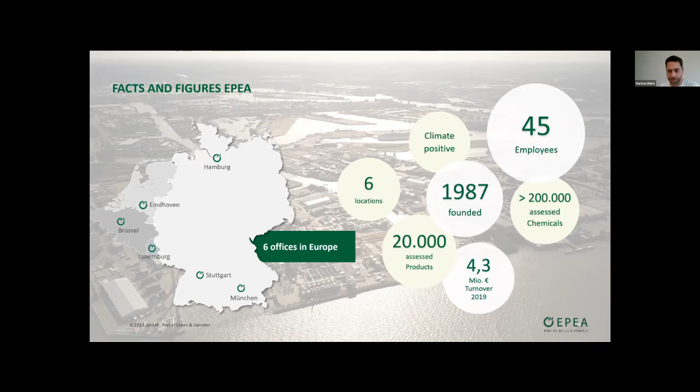Quickly about EPEA, we are 45 employees overall in 6 offices in Europe. So the head office is in Hamburg basically, because this is where the company comes from with 35 people, and the real estate team with Pascal, they are mainly sitting in Stuttgart.

Now I would like to point out what is our challenge, because this is the reason that I talk to you basically, is that we have a lot of materials in construction industry, and after the usage time of a building, they are demolished like you see in this photo, and we don't really know what's happening with the materials nowadays. Some are still recycled, but we call this downcycling. Because if a facade window becomes a water bottle or a beer bottle, that is not upcycling, that's downcycling.

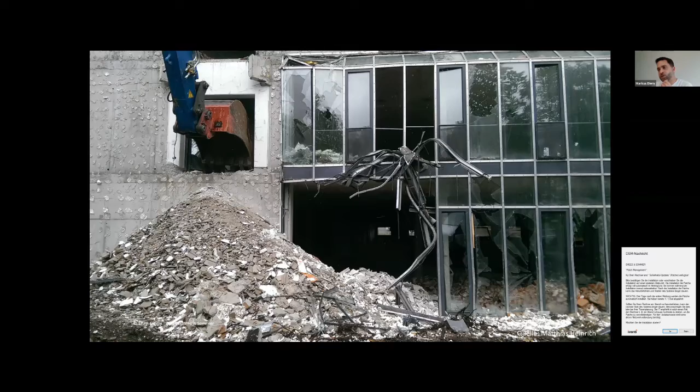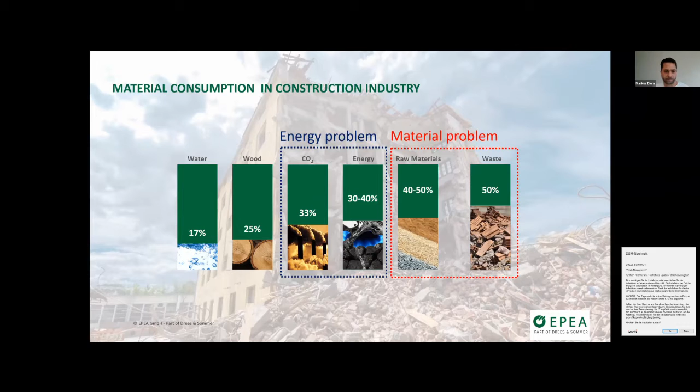So the next thing is that nowadays we have a big problem: we are mostly spending our time indoors, 90% of the time here in Europe on average. We use more and more different materials, and there's more and more chemistry in these materials, and it's not always known what these chemicals are doing to human health. There's a visible increase in people having allergies, and often the source is that bad materials are used with poor indoor air quality, and this is what makes people sick. We have huge problems here in Germany, also with schools, where the indoor air quality is so bad. I think the right answer is to use healthy materials in these projects in future.

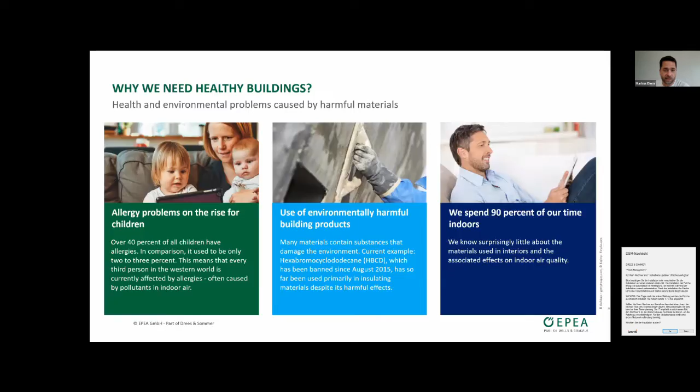Why is this happening? Back in the days, 200 or 100 years ago, we did not have so many different materials, and the building envelope quality wasn't as good as today. There were a lot of gaps, it wasn't really airtight, so bad air could move out and be ventilated. Then we came to saving energy, so we sealed our buildings, we even do blower door tests. The consequence is that all the toxic, harmful materials already inside are trapped inside. That's the problem you see in the second graphic here.

Where we need to go is to keep our buildings well insulated so we use less energy, but the materials inside need to be healthy. This is the big issue, because if the materials are healthy, there's no harmful stuff inside the building. Michael Braungart always mentioned that sheep's wool isn't red wine proof - you can buy a natural carpet made of sheep wool, but the industry adds chemistry to make it red wine proof. What's in this chemistry, a lot of people, or we, don't know. So this might be harmful material.

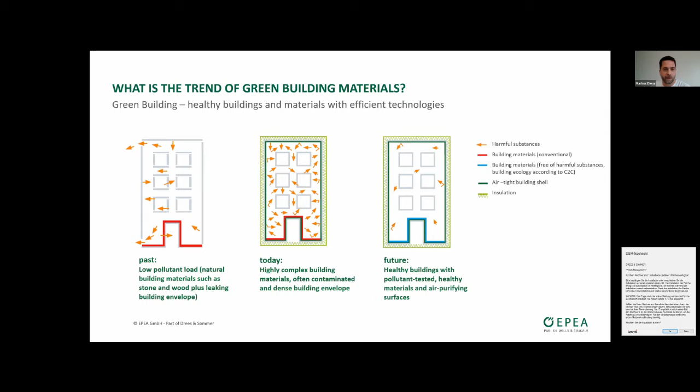Here you see something of this harmful material, which is basically in our lungs when we are inside an enclosed space.

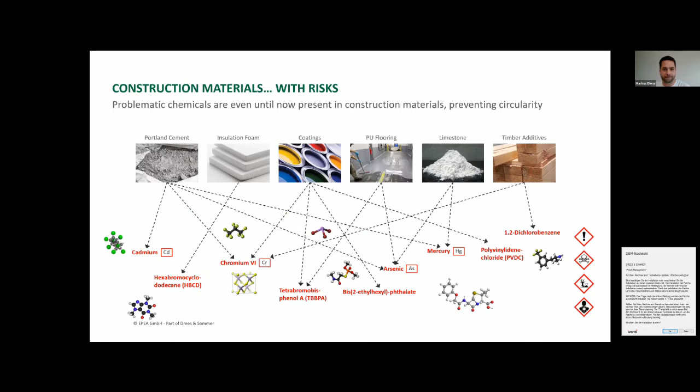So our solution basically starts with the cradle-to-cradle design concept, which I would like to explain quickly.

So here you see where we are today - this is the linear economy. We harvest a resource, we design it, we make it functional, and it should be cheap because it competes on the market with other products. The problem is we don't know what's inside. Now we do more repairing, reusing, and downcycling, but the issue is the content of the material isn't known - we don't know what's going on with it. It's not defined. The only thing we sometimes have is 'it's free of' - if harmful substances appear in the media, companies say they removed this chemical, but we still don't know what other chemicals are in it. This is the big issue.

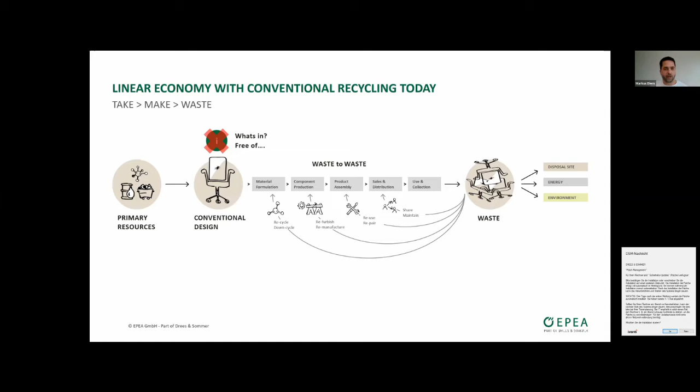I'll give you another example, the ocean plastic. We hear a lot about it. Companies nowadays make big advertisements. They say they save the turtles in the sea, they save the fish, they take the PET bottles out and make textiles out of it.

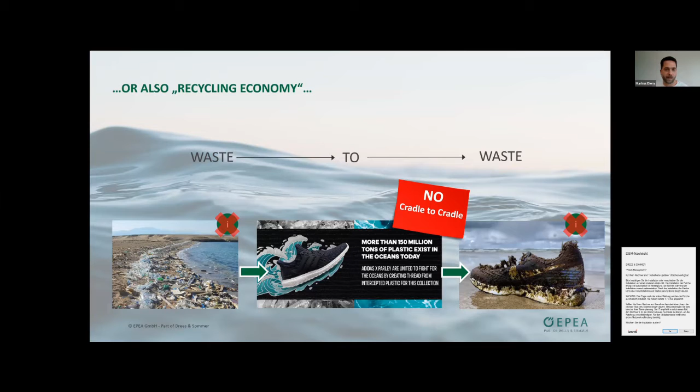So the solution is these two circles that I mentioned before: materials of products circle in a biological cycle and a technical cycle. This means everything which is used up, for example like a tire, the rubber coming down, that is coming into nature, into the environment. This is stuff which should be in the biological cycle because it's out there in nature. Other materials, like for a cell phone, the plastics, the metals, would be all circling in a technical circle. So this is the basic idea of cradle to cradle.

I cannot go so deep now to explain much more, but there's two circles. If you keep this in mind, this is already a big thing, and it works with most products in this world. I mentioned before that there's also a cradle to cradle certification system. This is becoming more and more popular nowadays, and here I'll explain a little bit about it. What's special basically is that it's international, and you can use it for all different products over a lot of different industries. And what it does is have a look at the material health.

This was what I was explaining all the time, that a product needs to be healthy. It looks at how you can reuse a product. It has a look as well at how it is produced. So the factory where the last step is basically done, we audit this factory, then we look for green energy, for water, and for social fairness.

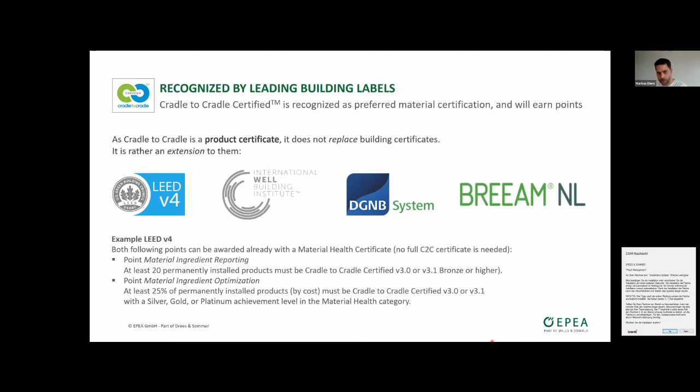Okay, so now we go to the buildings. Why does it make sense for buildings? One second, I have a technical issue here. I don't see that. Okay, it's coming.

So here is the rule again: first the material is safe, is healthy, then we design for circularity, and then on top, it should have a positive impact. What does that mean? I'll explain quickly.

But the beneficial part of this carpet is that it's even taking the dust from the inside air. It takes it into the carpet, and later when you vacuum clean it, this dust goes into the vacuum cleaner. So there were measurements made that prove that with this carpet, the room is cleaner than with a normal carpet. And this is what we mean by being beneficial inside the cradle-to-cradle system.

Overall, I would like to use this poster from Michael Braungart. He was exhibiting at the Biennale in Venice one day, and this was the poster of the booth. It basically says: building like a tree. This is a little bit of what's behind Cradle to Cradle.

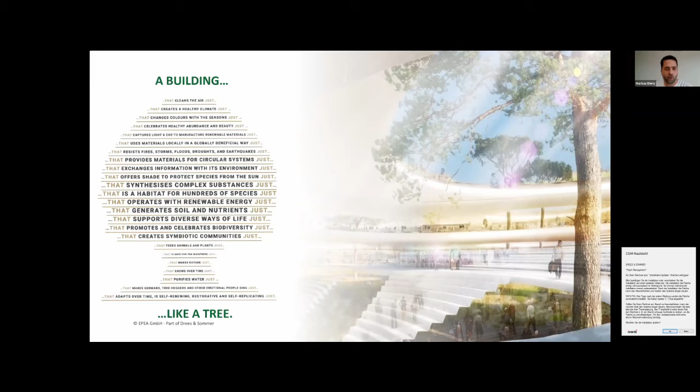Here's an interesting chart. It explains a VOC measurement, a volatile organic compound measurement, in a school building cafeteria in Germany. I use this to show you, on the bottom side, the threshold: TVOC is at 3000, HCOH is at 120. So these are the maximum limits that are allowed.

Here you see the measurements, and this was done when the building was still under construction—so it was brand new. You see that for the overall sum of all volatile organic compounds, we are at 6% of the threshold. For formaldehyde, we are at 3.5%. So it's significantly low. And honestly, we still want to go down to 0%.

But there are still things in buildings sometimes we do not know about. We are on the way of becoming better and better, but the target is, of course, that these bad things are completely eliminated from a building.

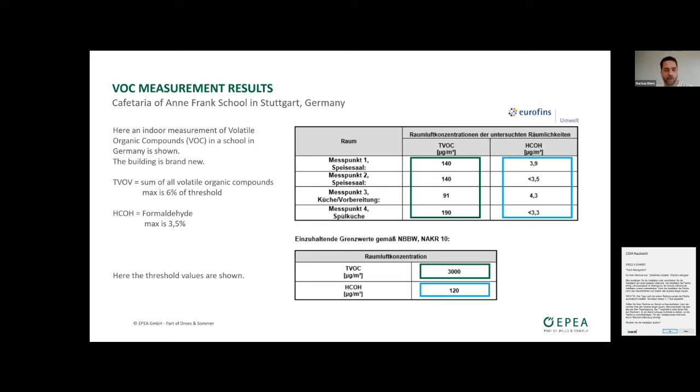Here's another idea coming out of the Cradle to Cradle system: you can use cities and buildings as raw material banks. Just imagine documenting the raw materials you use inside a project. We are doing this with the so-called building circularity passport.

In this passport, we write all the details, which is connected to the BIM model—and Pascal will go deeper into this later. With this, you have an identity for the raw material, and a raw material that has an identity suddenly has a value.

This value is something you can use later after the usage time, because a steel beam or copper wires in a building don't become bad by being used. They are still good—so it's a waste not to use this material. In the future, our cities will be raw material banks.

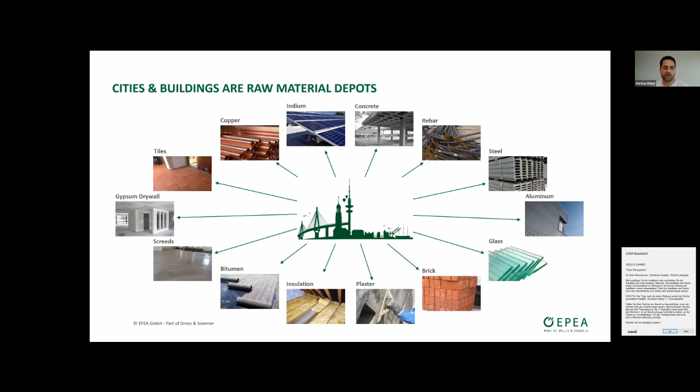Here I show you a little graph to explain the financial idea behind it. This green graph shows the development of a standard building: you build it, it's used, a lot of things don't work anymore, so you need to renovate it. The value goes up again, it's used again, and so on, and later you have to demolish it.

Sometimes you demolish buildings - I don't know about in Finland, but in Germany we pay 500,000 to 1 million euros because we have bad material inside and they're very expensive to get rid of. So cradle to cradle is in the beginning a little bit more expensive, but also has a higher value because cradle to cradle means you have better quality.

And this also means that the value of your building is not decreasing so fast like in a normal building, because the quality is better. Then you do a renovation and it's increasing less again, so there is a gap opening, basically, which you see here. The building can be used much longer.

A cradle-to-cradle building is flexible, it's modular. Some buildings are built in a way that they become an office, but in the planning you already think about maybe it needs to be a hotel or something similar down the line. So we are very flexible with cradle-to-cradle.

And the development of raw materials, the pricing is very likely to go up. In the last year, we have a number here, nearly 5% increase in one year, so it will become much more in 100 years. Just imagine that the steel you pay 1 million euros for nowadays, maybe in the year 2150 you get 5 million, 10 million for it. So you even make money with it. This is a very interesting approach, and our investors, real estate developers, are really very, very keen on this.

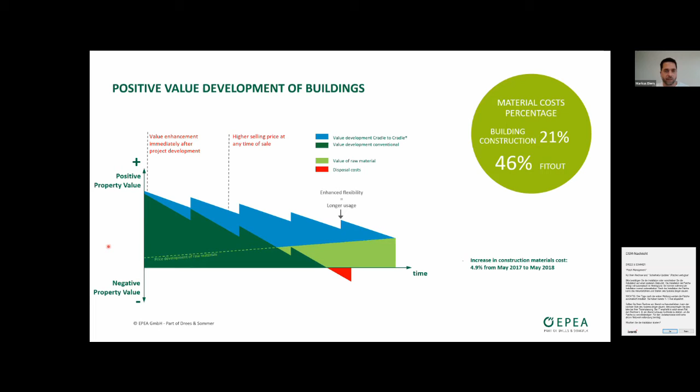Thank you, Markus. So Markus explained a little bit on what the theory behind is, and what the principle is we want to use and apply to buildings. I'll go right now a little bit more into what do we actually do in the projects and how do we do it.

I'll have to tell Markus to switch the slides sometimes, so please don't mind me doing that.

What we do in those projects is basically we developed a new planning principle in planning projects. Because of course the cradle-to-cradle principle, or the circularity, is something that needs to be given into a planning process with someone that has the responsibility to do this as well. And this is the role of the circular engineer in those projects.

This circular engineer is responsible for making, as Markus already explained, the building healthy, recyclable, and flexible. The whole circularity only works if all of those three properties are designed in a very good structure and work together. So it doesn't make sense if you have recyclable materials but can't separate them from the other materials. This is why it's very important also to regard the dismountability and the flexibility in the building.

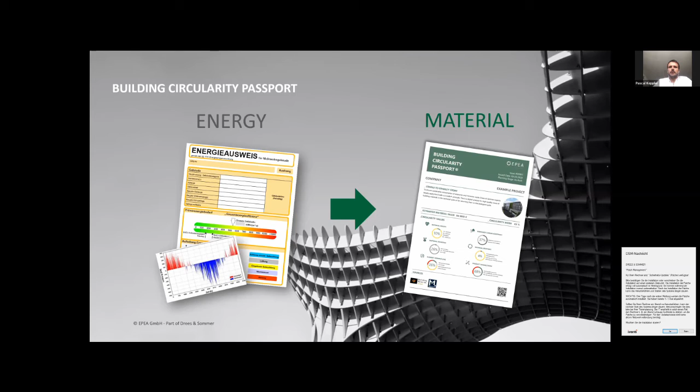It's our approach, kind of an equivalent to the energy passport of a building, but regarding materials. So a material passport that includes all the information shown on the next slide about the materials that are used in the building, and also of course the values, which makes them a material bank, basically. It shows, are those materials healthy?

It shows what is the carbon footprint of those materials, because as we optimize the buildings for their energy performance, of course the embodied carbon of the materials gets a higher relative impact on the environment. So this is a topic that we need to regard more and more in future.

We also have information on which materials are used. Is the building made up of virgin materials, or are secondary or renewable materials used? We see if the building is recyclable, or which materials will need to be disposed of or can maybe even be upcycled. We see if the materials are separate from each other, and of course we also see how the elements are designed - are they dismountable, are they flexible for changes in use during the lifetime?

And of course this passport is also completely integrated with BIM if BIM planning is used. Marcus, if you can switch the slide.

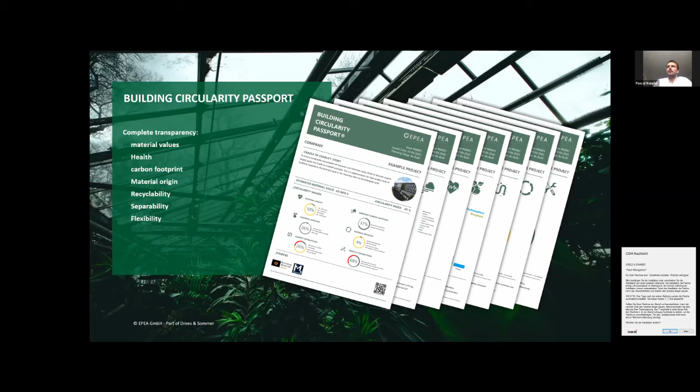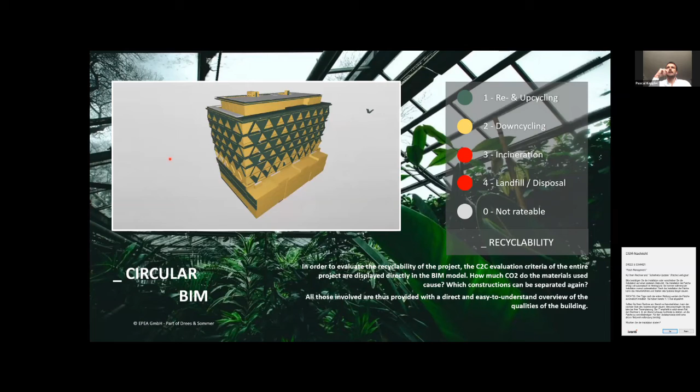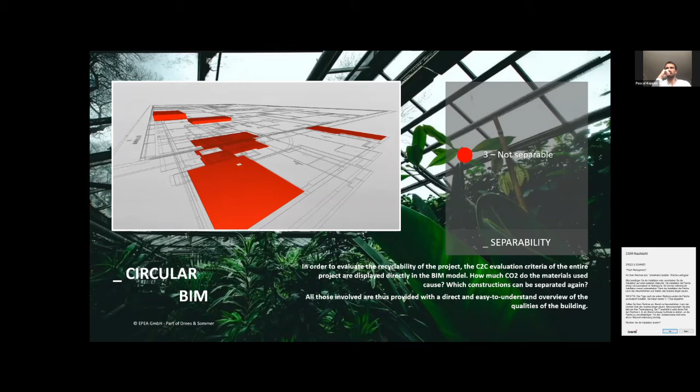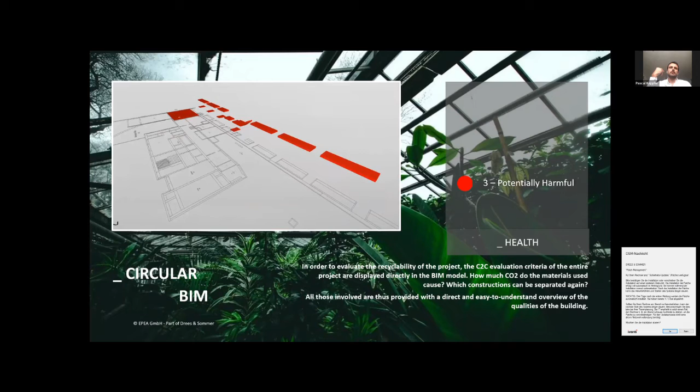Hopefully this video works. So we see here that we developed a scheme with which we can display the circular properties of a building directly inside the model, so that we can see for each element in the model, is it downcyclable, is it recyclable, how healthy is it? This gives a very good opportunity to improve the building during its planning process, because we can show the building owner or architect where elements are still not separable as designed. Maybe we can put up a different connection, or change the material to have a healthier one.

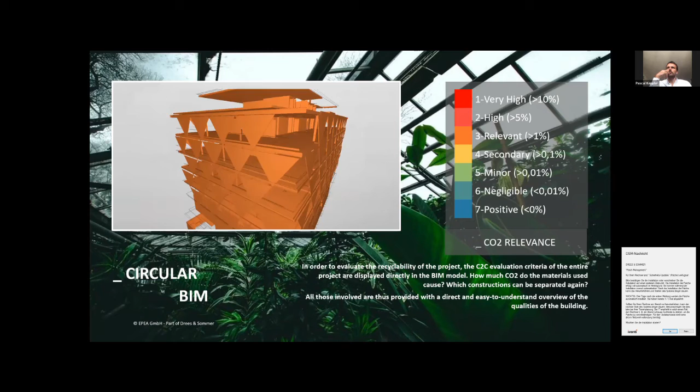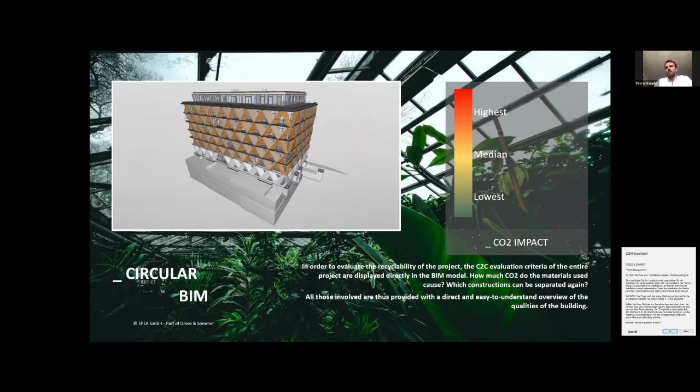Of course, the topic of embodied carbon or CO2 can be regarded here as well. So we can display clearly which elements have a high impact on the carbon footprint of a building, which elements have a lower impact and we don't have to regard them, and which elements will still need to be optimized.

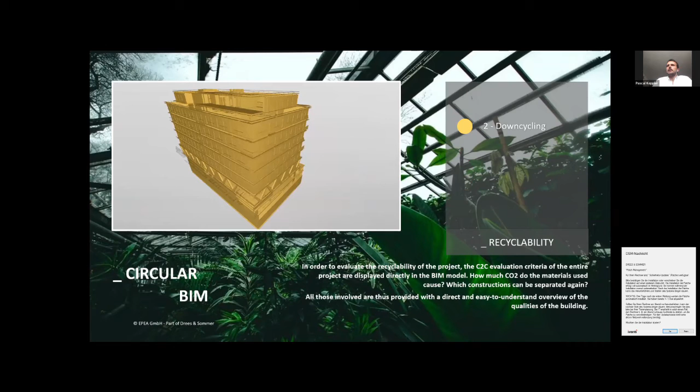If you go to the next slide. By having that information and also the connection to the elements in the building, we can clearly display what happens with the building throughout the year. Here's an example for the embodied carbon again, we can show where the impact of the building is - is it during its usage lifetime, or at the initial construction? So we can see where the impacts are, where we can optimize to design a building that is really cradle to cradle or circular.

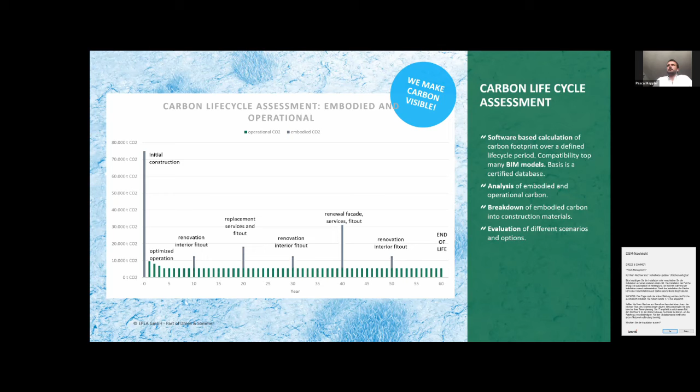Next slide, please. One thing that is very important that many people forget when designing buildings is that we need to look at the actual products, because often products are just regarded as generic materials. So we have a gypsum board, for example. The gypsum board itself can be produced with renewable energy, can be produced with healthy materials, or can be produced with harmful materials. This is why it's very important to look at the actual product when documenting or rating a building for its circular properties.

And because that information is at the moment very hardly accessible, we developed a solution for that, which is the Building Material Scout. This is an online database for products with sustainability properties. There are any kinds of products on it, but the strong focus is on which properties regarding sustainability they have.

If you go to the next slide, you can see that the principle works like this: on the one hand, we have manufacturers putting in their information themselves. The benefit for them is that based on the properties they put in about their products into the platform, there is an automated assessment methodology that rates the product according to the green building schemes.

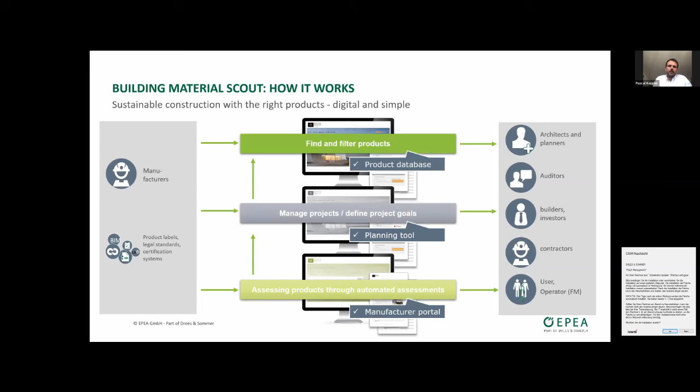Okay, so this for the theory. As the last point, we'd like to point out some references so you know this is not just a theoretical talk, but it's already happening on a daily basis that we're doing this.

So the first project where we implemented that was the RAG project in Essen in Germany, which was part of a scientific project as well, called Buildings as Material Banks. This was a pilot project where we tried to optimize the building in all layers of the cradle-to-cradle principle.

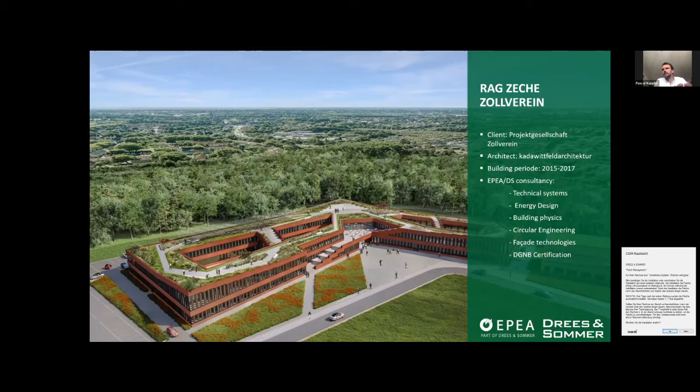We also integrated that with our colleagues from Drees & Sommer, who did the other consulting services or planning services for the construction. We can see here that we have a rooftop that can be accessed by the public. We have a facade that has been specifically developed for C2C properties with Schüco together, exactly for the project. It's a flexible modular system. We have photovoltaics on the roof, of course, and it's also certified DGNB Platinum.

So this was the first project, but there are many more.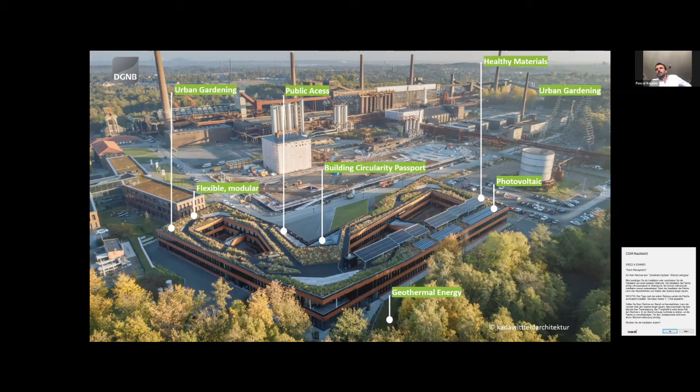For example, a bit of a smaller project, but it shows that it also can be done on a smaller scale, which is a firefighters' house in the Black Forest here in Germany.

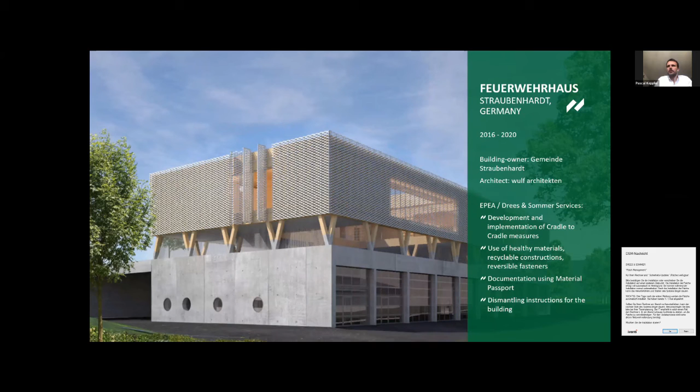We also have bigger projects like the Schüco project, which should be on the next slide. This is a very innovative project because it's the first building that's going to be certified with the highest levels of DGNB, LEED, BREEAM, and will be designed according to cradle-to-cradle principles. This is because Schüco as a manufacturer itself also wants to drive this and show that something like this is possible.

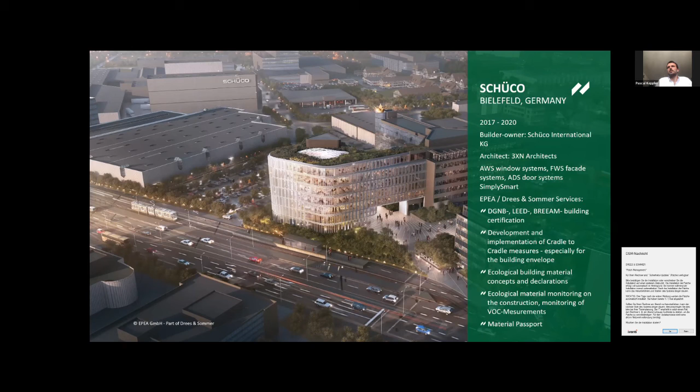We also have international projects like, no, that's the wrong one — but this is a very, very detailed project as well, where the building owner said he wants to really have the name on it, so this is why it's called the cradle. There we really developed new systems that are implemented in the building. For example, the wood that is used is not treated at all, so it can be really recycled and doesn't have to be burned or disposed of at the end of its useful life.

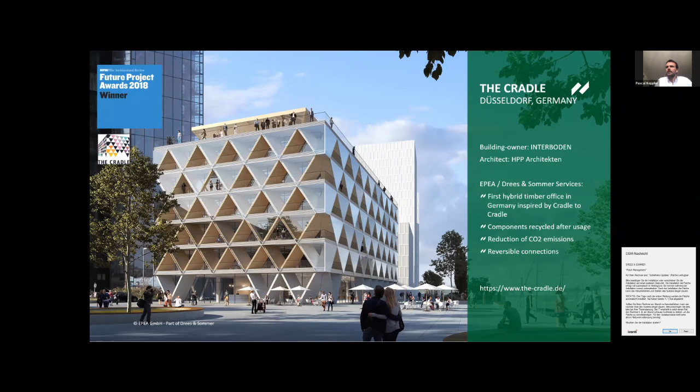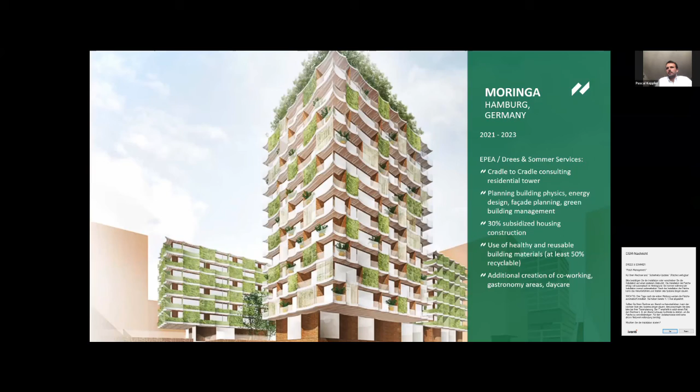And for the next building, I think this is the project in Luxembourg. Okay, this is one of the first residential projects that we have, which is in Hamburg. It's also completely, since the first hour of the project, designed according to cradle-to-cradle principles. The architects made the facade elements completely reusable, including the vegetated elements on the facade. Yeah, thank you, this is for now.